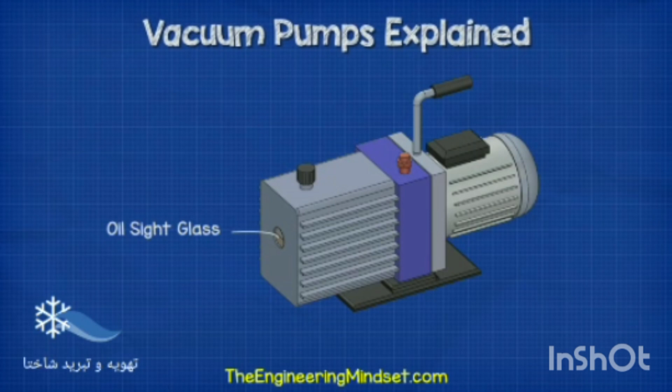On the top we have a handle, and on the bottom a support base. We have an inlet which connects to the system to remove the air, and above the compressor section we have the exhaust or outlet. On the front of the compressor section we find an oil sight level glass so we can tell how much oil is in the chamber as well as its condition.

As we take the unit apart, we can see that we have a fan and protective casing mounted at the back of the motor. Then inside the motor we have the stator which holds the copper coils, but we're going to look at this part in detail just shortly.

Concentric to this we have the rotor and the shaft which drives the compressor. At the front we have the compression chamber.

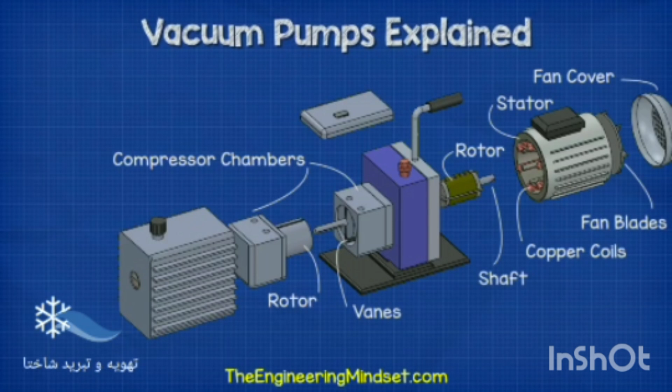This is the two-stage compression version which allows us to pull a deeper vacuum, so we have two compression chambers. Inside the chambers are the compressor rotors and the vanes which move the air out of the system. On top of the compression chamber is a reed valve which vents the exhaust.

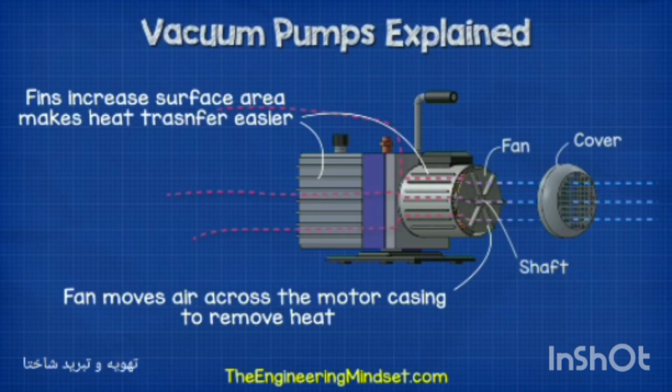When we remove the fan's protective casing, we see that the fan is connected to the shaft which runs through the pump. The fan is used to cool down the electrical motor, and it will blow ambient air over the casing to dissipate heat. The fins on the casing increase the surface area, which allows us to remove more unwanted heat.

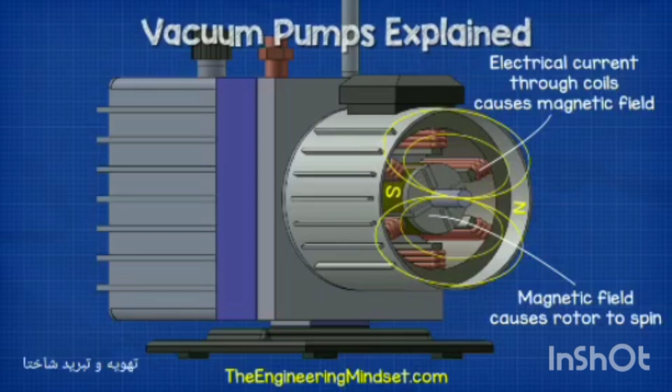Inside the motor we have the stator, which is wound with copper coils. When an electrical current flows through the copper coils, it will generate a magnetic field. The rotor is affected by this magnetic field, and this forces it to rotate.

The rotor is connected to the shaft, and the shaft runs along the length of the pump from the fan all the way up to the compressor. This way, when the rotor rotates, so will the compressor, and that's what we're going to use to create the vacuum effect and evacuate the air from the system.

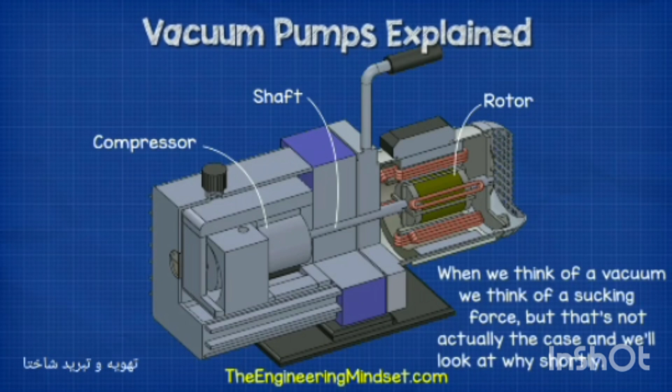Just to note that when we think of a vacuum, we usually think of a sucking force, but that's not actually the case, and we're going to see why just shortly.

If we look inside the compressor, we can see we have the inlet, which is connected to the system we're evacuating. Then we have the outlet and the reed valve, which vents the air and moisture being evacuated from the system. In the center, we have the compression rotor and the compression chamber.

Notice the rotor is eccentrically mounted inside the chamber. This means it isn't perfectly central. That's a key feature which we'll see in detail just shortly.

The shaft connects to the rotor and will cause it to rotate. Mounted inside the rotor are two spring-loaded vanes. The springs are always trying to push the vanes outwards, but they're held in place by the compressor chamber walls.

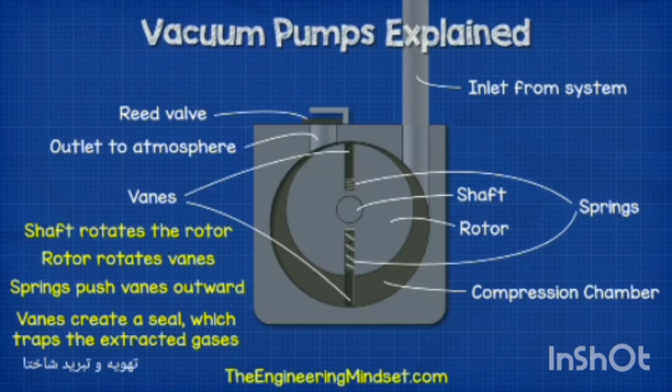Therefore, the tips of the vanes are always in contact with the wall, and there's a thin layer of oil which helps to form a seal between the two. When the rotor rotates, the springs continue to push the vanes outwards, so the vanes will follow the contour of the compression chamber. When the pump starts, the rotor is going to move across the inlet and expose an area inside the compression chamber.

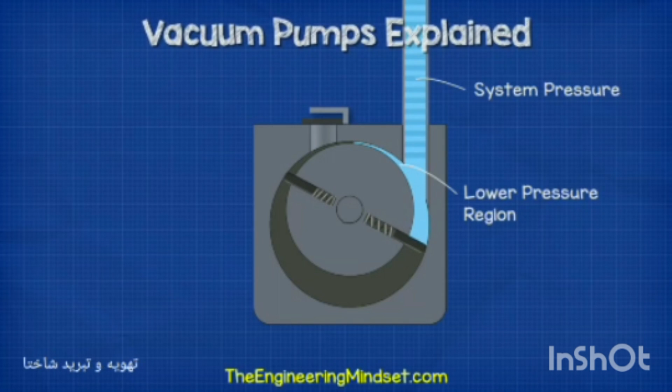This area will be at a lower pressure compared to the pressure inside the system, so the air and moisture inside the refrigeration system is going to rush in to try and fill this empty region. So then why does it do this?

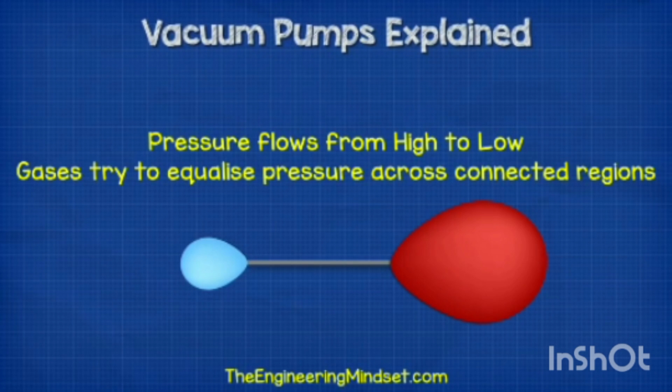Well, pressure always flows from high to low. So if we connected, for example, two balloons of different pressures, the gases will move from the high pressure side into the low pressure side until both are of equal pressure. In this example, the low pressure side was a vacuum, but it didn't suck the gases in. The high pressure side pushed its way in. That's the vacuum effect. Gases want to equalize and will flow from a high pressure to a low pressure.

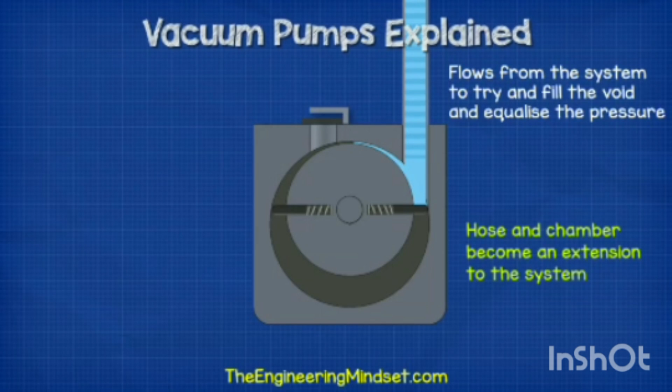Therefore, we use a vacuum pump to create a region of lower pressure so that the unwanted gases inside a refrigeration system will rush out to try and fill this lower pressure region. So in our scenario, the connection hose and the new low pressure area within the compression chamber have become an extension to the refrigeration system. So the gases in the system rush in to try and make the pressure the same between the two.

But it's actually a trap, because as the rotor continues to rotate, the second vane sweeps in and traps that volume of gas in the chamber between the two vanes. The other vane then passes across the inlet and creates another low pressure region, so more gas rushes in from the system to try and fill this void.

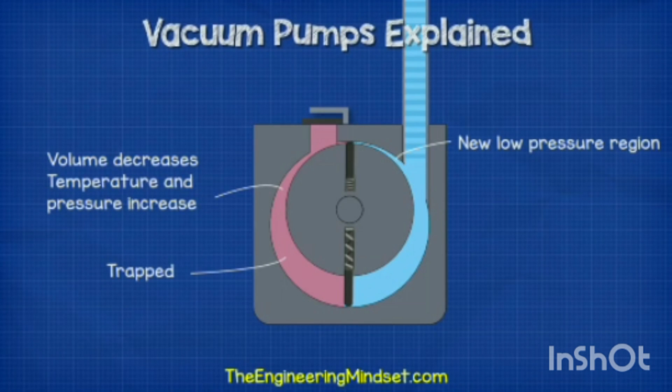As the compressor rotates, the volume of the chamber starts to decrease. That's why the rotor isn't perfectly centered, so that we can vary the volume of the trapped gases. This decrease in volume compresses the gases into a tighter space, which increases the pressure and the temperature.

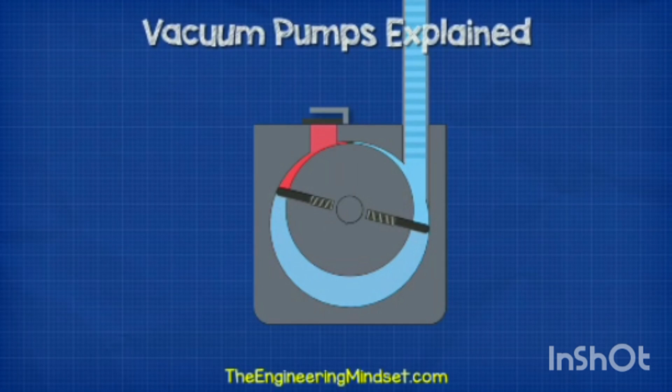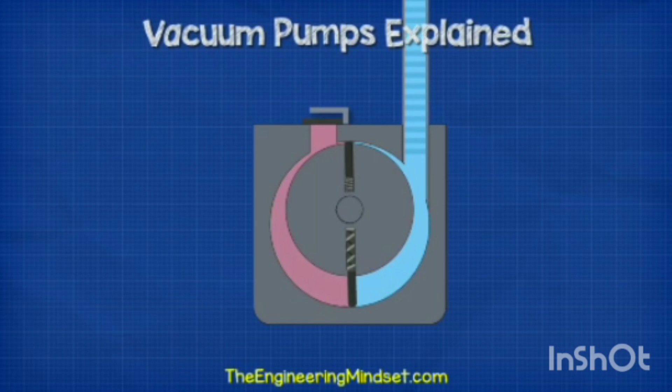It continues to rotate into a smaller volume until the pressure becomes high enough that it forces the reed valve of the exhaust to open and the gases are then discharged. The compressor continues to rotate, and as it does so, the next batch of gases is pulled into the system and the cycle continues. Most vacuum pumps will be two-stage, meaning there are two compression chambers linked in series.

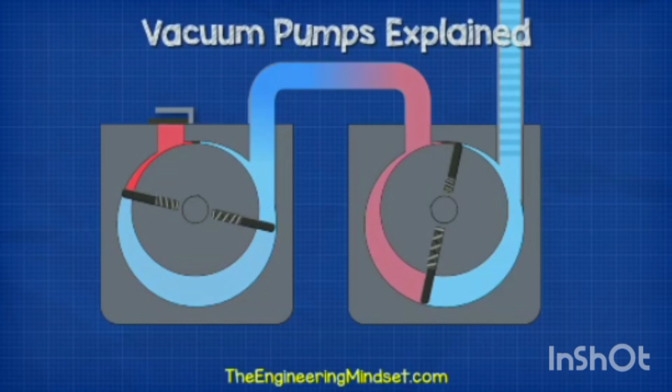The exhaust from the first compressor links directly into the inlet of the second chamber. This design allows the pump to achieve a deeper vacuum.

When we have a single compressor, the outlet is pushing against atmospheric pressure. But with the two-stage design, the outlet is pushing against a much lower pressure, because it's simply the inlet of the second rotating compressor, and the low pressure region is created during that rotation.

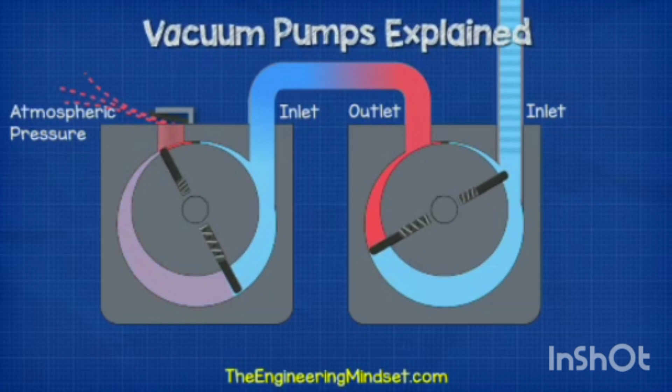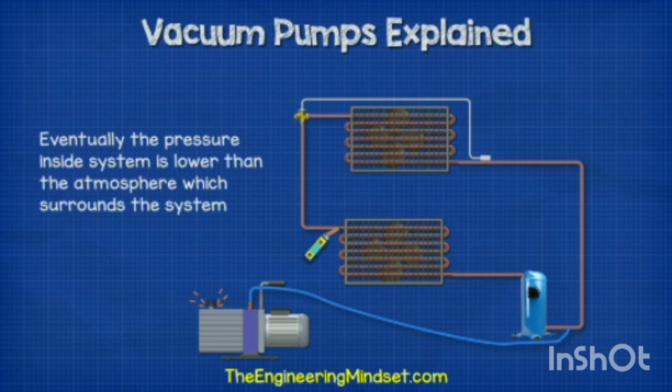As the vacuum pump continues to run, it will eventually pull the gases out of the closed system, reducing the pressure below the pressure of the atmosphere surrounding the outside of the system. As the pressure reduces, any moisture in the system will become easier to boil and evaporate. We can add a little heat with a heat lamp or a heat gun to help it vaporize, and that way we can extract it from the system.